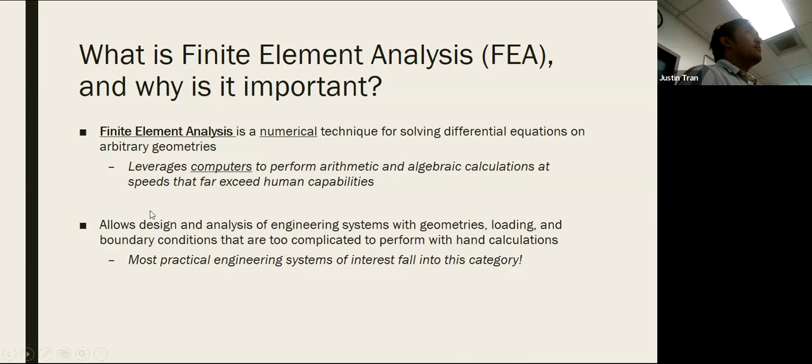Okay, so let's give some definitions. I'm going to talk about analysis a lot because FEA at the end of the day is a type of analysis. When you look at the types of analyses done in engineering, I categorize them in three different kinds. Number one is analytical. These are what I term pen and paper calculations. If you look at your previous theory classes, like 331 solid mechanics, 407 heat transfer, 333 fluid mechanics, a lot of those involve solving equations by hand, often painfully and sometimes involving crying. Those are what I call analytical methods.

The good things about analytical methods is that they're usually fairly fast and inexpensive. All you need is a pencil and paper and probably just a very sad engineering student. But the problem is that you can only use them on very simple problems. As soon as you throw any kind of complexity, even going from 1D to 2D, it becomes impossible to use analytical methods. But it's important to note that that is a valid type of analysis.

All right, number two is experimental. Experimental refers to going out and trying it in the real world, either doing a lab test or a field test. What I always say is it's the best way to get data. Ultimately when you design engineering systems, they're designed to work in the real world. We're not playing Minecraft. So to really find out if your design is going to work in the real world is to test it, to get concrete evidence and observations to see if your car is going to withstand a crash.

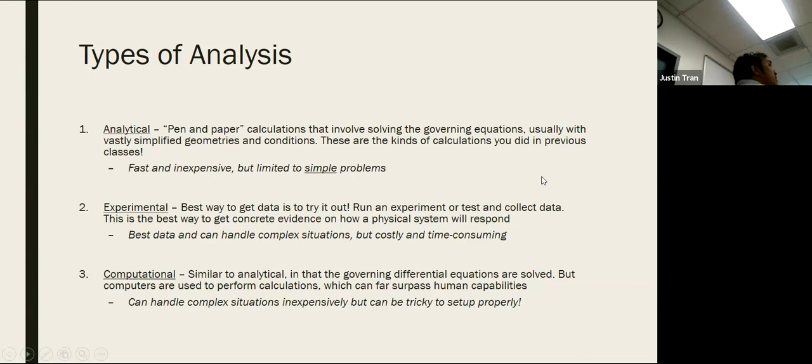Okay, so let's do an example to show you the limitations of all the different methods, right? So let's say that we're analyzing a beam. So here we have a simple beam, a pin support on one end and a roller support on the other, and we have a distributed loading on top. So this is probably a problem that you've seen in 331 in your previous classes, right?

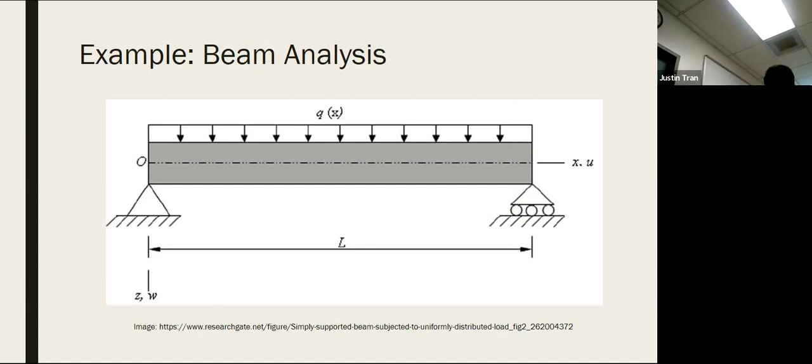So this problem, I think, is simple enough that you can solve it by hand, because there's a beam equation that you can solve, and this geometry is simple enough, the loading is simple enough. But in terms of practical usefulness, you're almost never designing a simple beam by itself. And so a more realistic situation is something like this, right?

So let's say that you're in charge of designing an entire building, which is made up of hundreds of beams, right? And you want to see, when you load these beams, when you put people in the building, when you put furniture, equipment in the building, are the beams going to survive, or is the building just going to totally collapse on itself? And so this kind of situation is way too complicated to solve by hand. And so you need to use FEA to solve this system.

Okay? And so if you were to run an FEA simulation, you would probably get a figure something like this, where the colors represent something like maybe the amount of structural stress that the part is under. And so the red areas would indicate those areas are probably more likely to fail than the blue areas. Okay.

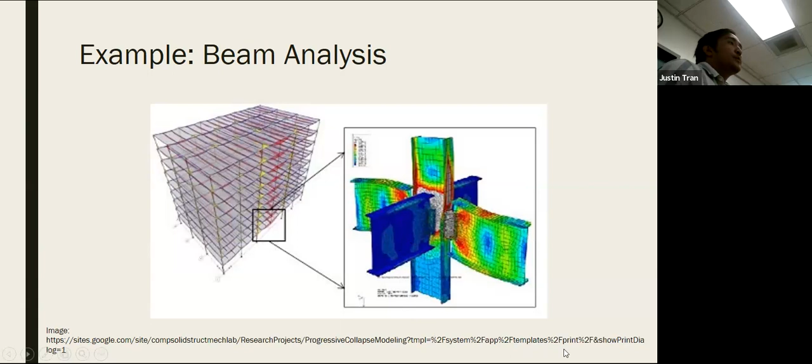So FEA, for this class, we're going to be focusing mostly on structural engineering. And so we're going to be doing a lot of examples just like the previous one. But you can also use FEA to solve different types of problems as well. So I would say the second most common use of FEA is in thermal engineering, heat transfer.

Okay. And so here what I have is a very simple heat transfer problem. So we have a rectangular wall and we have a gradient of temperature. So we have a certain temperature on one side, T1, and a certain temperature on the other side, T2, okay? And so with a very simple case like this, you're able to solve this by hand using the heat equation to find out how the temperature varies.

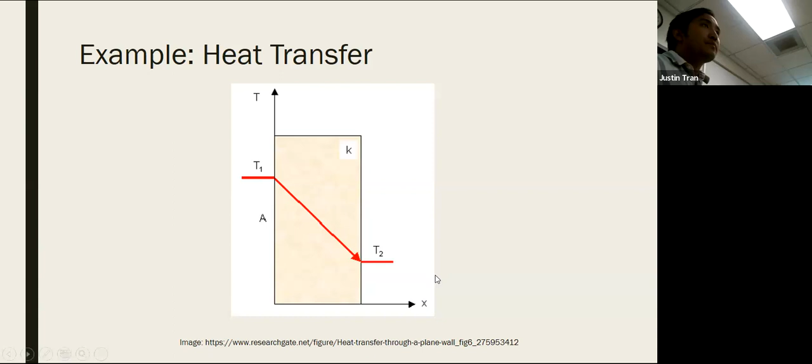Okay? But if you were to have a more complicated situation, so let's say that in this case we have a turbine blade, okay? And so let's say that it's part of an aircraft engine or something like that, where you have hot gas that's passing through as a function of time, and the turbine itself is spinning, right? And you want to find out whether your turbine is going to melt or not.

And so in this case, because you have fairly complicated geometry, very complicated boundary conditions, this would be basically impossible to solve. You wouldn't be able to solve this using pencil and paper. And so you would have to use FEA to solve this type of problem.

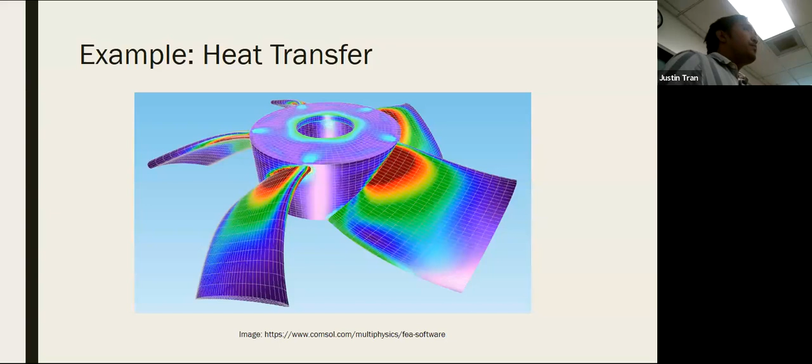All right, and so the final example that I'll give is in fluid mechanics. And so I would say this is a little bit less common. If you're going to do CFD, typically you use a different method called finite volumes. But technically you can use FEA for fluids as well. It's just you have to formulate it a little bit differently.

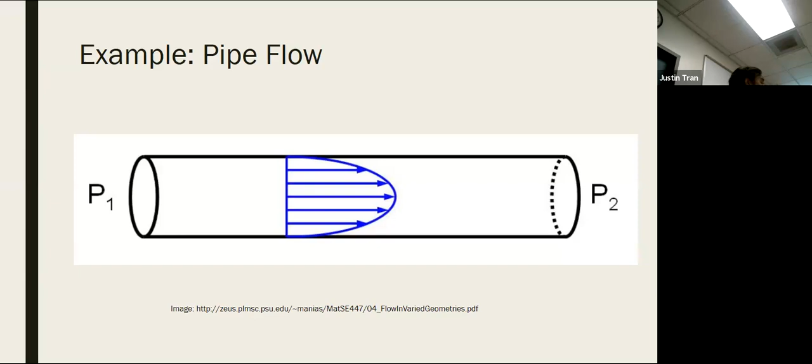All right, so hopefully the theme that you'll see from all these examples is that, yes, it is important to know how to do the analytical calculations, the pencil and paper, because that's where you really understand the concepts of the theory. But when you actually go to apply that to complicated practical situations, a lot of the time you're going to need to use computers to help you out, and FEA is the method that's used. Okay, any questions on this so far?

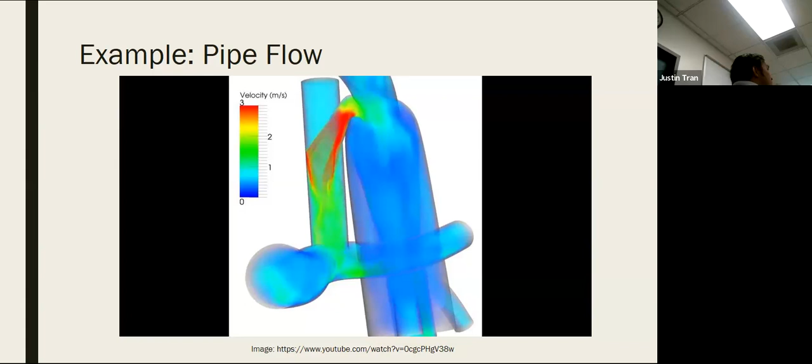Okay. All right, so for the next part, I want to turn it over to you guys, and this is honestly the part of the semester that's most exciting. I'm always really hyped to teach this class because I know a lot of you are coming into FEA with an application already in mind. So either you have your senior design project already, or maybe something you're working on at work, or maybe just something you're interested in personally. And so I want to hear from you guys.

So what are you working on for your senior design that you want to apply FEA to? Something you're working on at work, or just anything. So what are you guys looking forward to applying FEA to? Okay. Rocket, yeah, Titan Rocket. I think almost every year there's always at least one or two projects at the end that apply FEA to Titan Rocket. So yeah, great application. I think last year they actually did both a structural and a thermal analysis, which was good. Anything else?

MJ, so medical devices, yeah, great one. That's definitely something in my wheelhouse, something I've done before. There's a lot of testing that goes into medical devices, and medical devices have the additional complexity where it's even more expensive to test them, because if you test a medical device on someone and it doesn't work and the person dies, that's even worse than wasting a lot of money; you're responsible for killing someone, which is really bad. And so FEA is used a lot in the

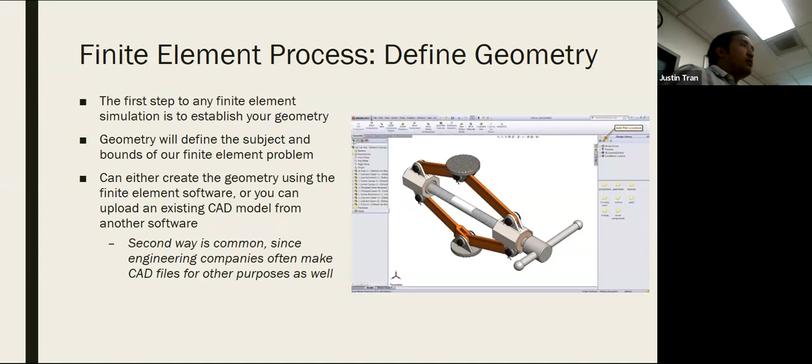Okay, second step, you're going to specify the material properties. So, getting the geometry is the first step. From there you have to define what material your part is made out of. Okay, and so I think this is a step that you probably have done as part of your SolidWorks courses, but probably mostly just for the visual effect, right? So that your metal parts look metal, they look shiny, and the wooden parts look wooden

and not shiny, right? But for FEA, it plays a more important role because all the different materials have different strengths, right? And so we expect something like steel to behave a lot different than rubber, right? So if you have a car made of steel, that's going to give you a lot more confidence than driving around a rubber car, because the rubber car is just going to crumble, right? It may not even support the weight, okay?

And so a very important part of FEA is, once you have your geometry, to define what material it's made out of, so that it can behave appropriately, right? Because the next step, what we're going to do is apply boundary conditions. So we're going to apply loads and things, right? And so when you apply 100 pounds onto a steel frame, that's going to behave a lot differently than applying 100 pounds onto like a rubber frame.

Okay. And so, applying material properties is very important. And actually, surprisingly, it's a step that a lot of people forget, especially throughout this semester. So, definitely don't forget this. Okay.

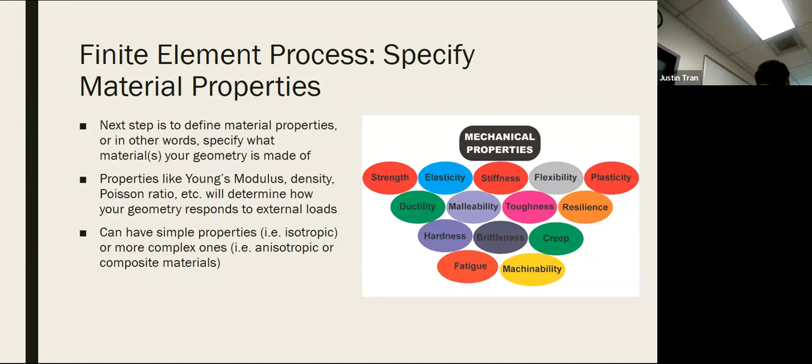And so probably some terms you're familiar with in terms of material properties are things like the Young's modulus, or the elastic modulus, things like density, Poisson ratio. Okay. All of these are important in terms of how the material behaves. And so you want to make sure that you have the right numbers for all these things.

Okay. So the next step is to discretize. And so this is probably the coolest step and probably the step that most people see when they look at FEA. By discretization, what I mean is to take your geometry and break it up into much simpler shapes. Because the way FEA works is that ultimately you're going to be solving the equations of solid mechanics on your part, but you can't do that on a very complicated geometry, at least not directly.

And so the way FEA works is that it takes your geometry and it breaks it up into all these little simpler shapes. You can almost think of it like Legos. So if you were to look at a geometry and imagine, if I were to make this out of Legos, what would it look like? That's kind of what discretization means.

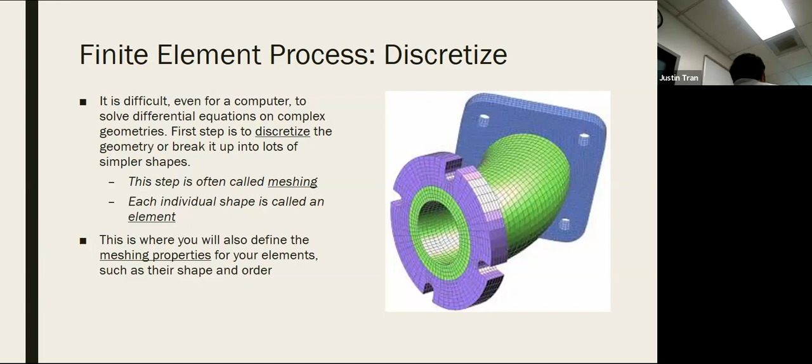So when you say I want to generate a mesh, it's to basically generate a discretization, or a breaking apart, of your geometry. And each individual shape here is known as an element, hence the name finite element analysis. What we'll discuss throughout the class is that meshing is probably the most unique part, and probably the step in the process that has the biggest effect on your results. So we'll talk in this class about how to mesh things properly to give you the best results.

All right, so the next step is to apply the boundary conditions. Boundary conditions are all the loads and constraints on your part. Oftentimes when you perform FEA, you want to know how the part is going to perform in practice, right? So when you apply forces, moments, torques, fixes and things like that, this is the step where you apply all of them. We summarize all those in something called boundary conditions. We'll go over that again Thursday, but think of it as the loads and constraints.

And to apply the boundary conditions, oftentimes you have to imagine your part in isolation. Which can be difficult to do because oftentimes you're only doing an FEA of a certain part of your structure, and it's probably connected to other parts. But you have to imagine, if I were to isolate that part, what are the forces that are going to be applied? We're not going to think about this too much on the first activity, but in the second activity this will become more important.

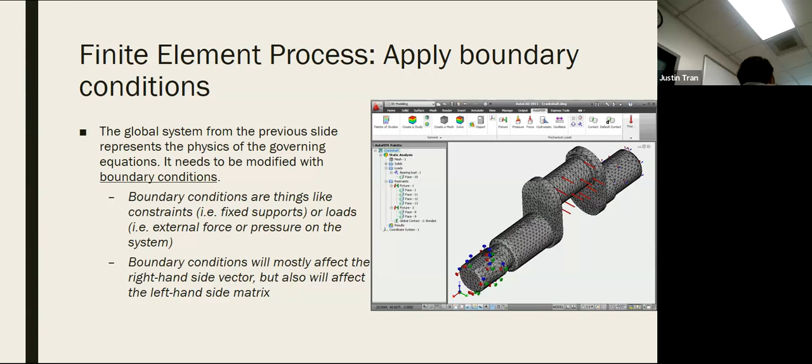So this next step is called assembly. You don't really have to worry about this part too much because it's handled mostly by the computer. But once you've done the mesh, the material properties and the boundary conditions, what the computer does underneath the hood is create a very, very large system of linear equations, and it assembles it into a big matrix. We'll talk about the theory of this probably in the second half of the course. When the software is computing stuff, this is what it's doing.

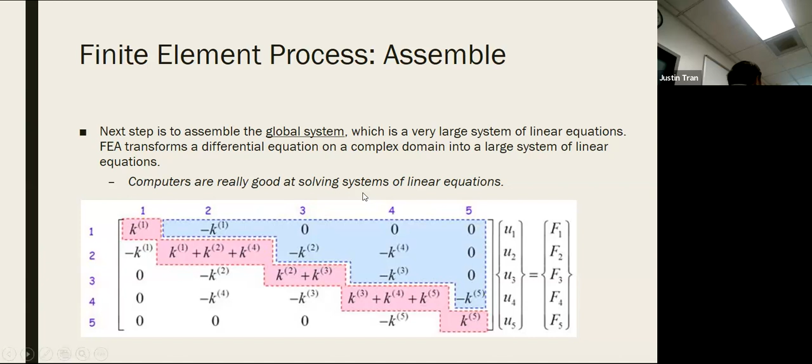The next step is to solve, and for the user it's a very easy step. You just click a button and you solve it. But the computer is actually fighting for its life while you're just sitting back and chilling. Solving these systems is very difficult for the computer. You just don't see it, but in reality there are a lot of computations done underneath the hood.

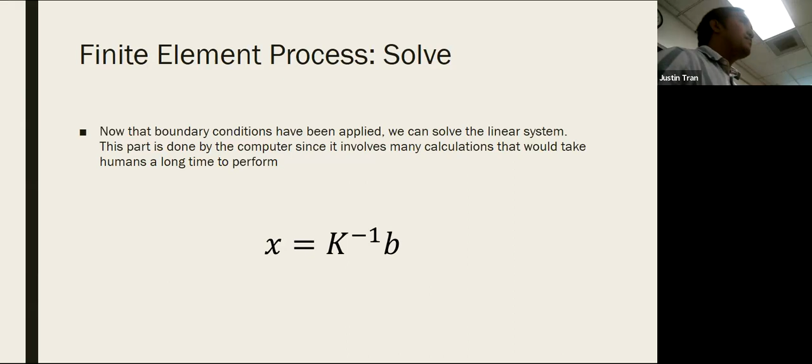Usually red is used to indicate stuff that's high. When we look at things like stress distribution, red usually indicates where stresses are very high - that's where the part is likely to fail. Blue is usually used for low magnitudes. Once you're in ANSYS and visualize this, it becomes easier to understand. But this is kind of the last step.

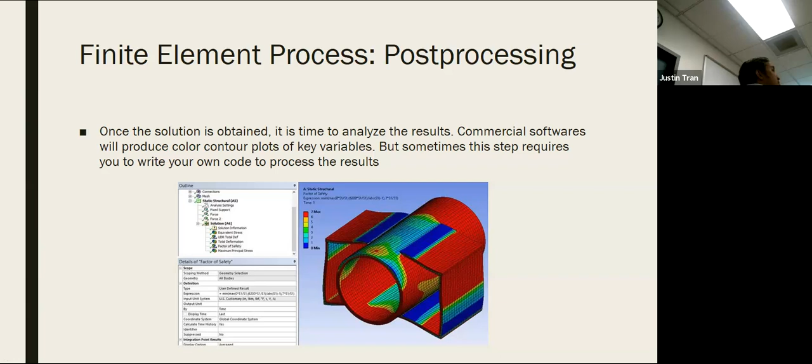All right. Any questions on this so far? Okay.

We're gonna learn a lot about ANSYS, and I think that's probably the most exciting part of the class. But we are going to learn a lot of background knowledge as well. A question I get all the time is why do we bother learning the background? I just want to learn ANSYS.

The background knowledge is useless, right? I know that's kind of the general feeling, but by taking this class, not only are you going to be expected to use ANSYS well, you need to understand all the steps in the process as well. Because at the end of the day, FEA is nothing more than a tool. You can think of it as no better than a hammer or a saw, or a lathe or something like that. It's just a tool for you to do engineering analysis.

Even though tools can help you do amazing things, they can also be misused a lot as well. Just like any tools, it has its limitations, it has its best practices that need to be properly understood before you can use it effectively. That's why we do the background knowledge, so that you can understand what these limitations are, so that you don't use it incorrectly.

I think the temptation when you use FEA is that you think it's going to work all the time. It's literally your engineering Bible - you just put it in the computer and it tells you what to do, right? That's what people think FEA is, but it's not. It's not going to work all the time. You need to understand the situations where FEA is going to work really well and situations where it's not going to work really well.

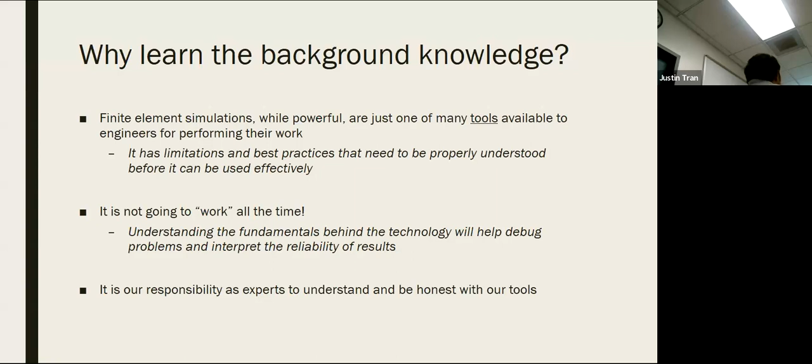All right, let me give you an example - the example of a vet. When your pet is sick and you take it to the vet, you expect the vet to be able to do what I call procedural skills. You expect them to be able to give shots to your animal, take a blood sample, and perform eye and ear checks. So that's a given.

But what we also expect from our vet is they need to know conceptual knowledge as well. They need to know why they're giving your animal a shot - they're not just shooting random stuff into your pet. They need to know why an animal is sick, what to do when an animal is sick, and they need to be able to interpret animal behavior as well. So they're not just doing the stuff, they're also understanding, processing and analyzing the material. It's the same with FEA - obviously the context is very different, but when you're an expert in the field, you need to know the conceptual knowledge.

Okay, this is the second to last point. You may be wondering why we use ANSYS. Even though it's very common, it's not the only FEA software out there. There's another one called Abaqus, which is very common, and other commercial softwares as well. I chose ANSYS for this class mostly because it's one of the most popular and widely used in a lot of companies. Knowing ANSYS is a marketable skill. You can put it on your resume, and companies will like that.

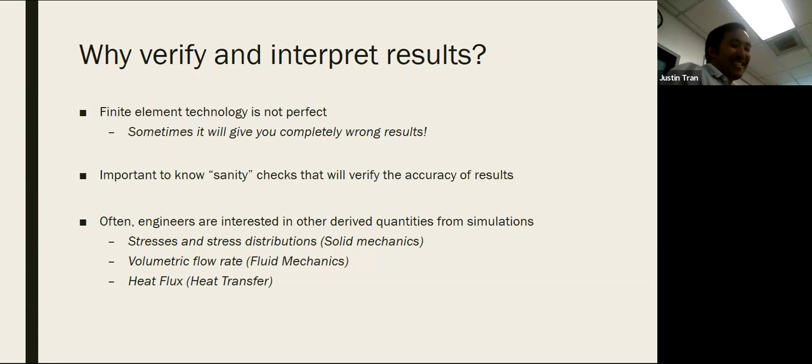Okay, let's talk about the syllabus. Maybe not the most exciting stuff, but we have to go over it.

Office hours are mostly for clarifying course concepts. So if you're confused about anything gone over in class, maybe you missed part of an activity and you're not sure how to do a certain thing, that's a great time to ask questions. Or if you just want to stop by and say hi, that's fine too.